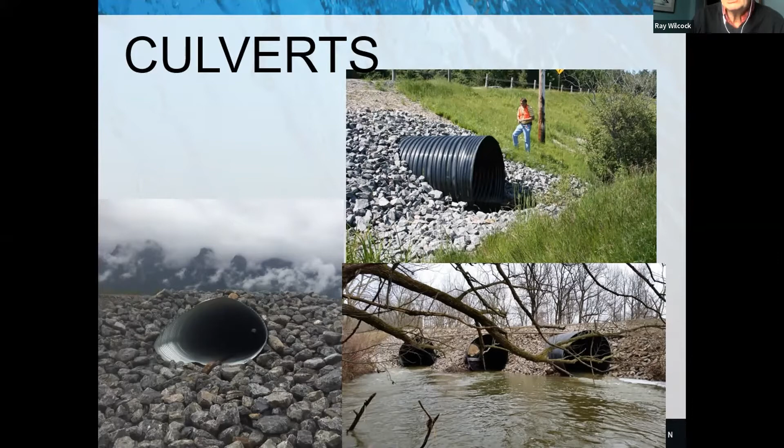This is a culvert, a little different from spiral rib, just to show you, from upstream to downstream, underneath maybe a road or a highway. There are millions of these across the country. They can be silver on the left or black on the right. Sometimes they come one at a time, or the most I've ever seen in a crossing is probably close to 13. But this is what we're going to talk about today.

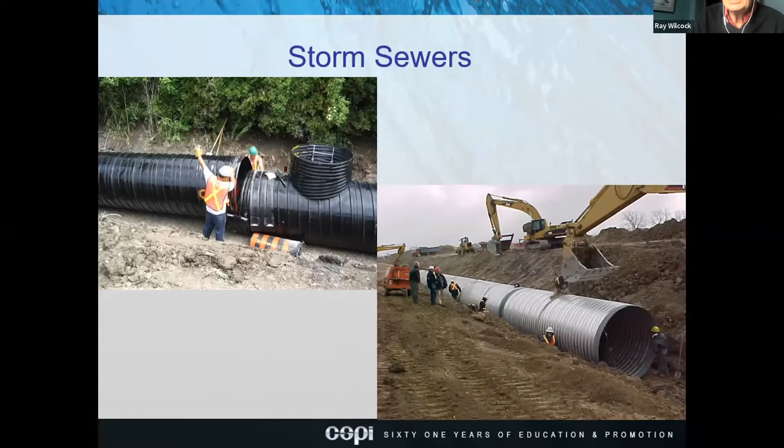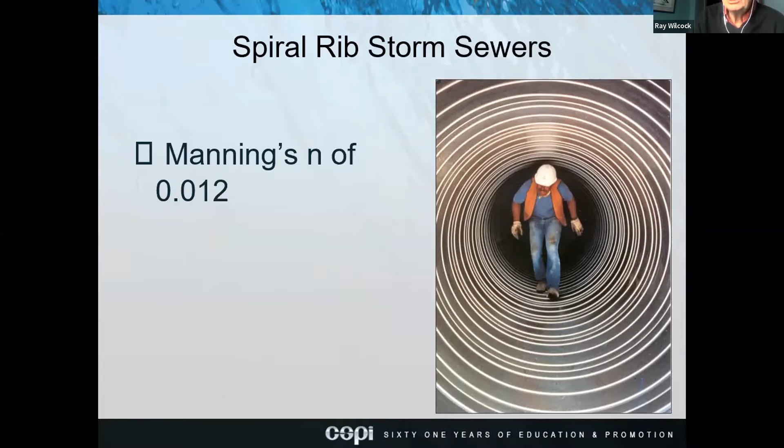This is a storm sewer. It's a spiral rib, so it is smooth wall inside, ribbed on the outside. Sometimes they come with risers, or they can be connected to a concrete manhole. The Manning's N for the smooth wall inside is 0.012, equal to a smooth wall concrete or a smooth wall high-density polyethylene pipe.

The profile for spiral rib is 190 millimeters from rib to rib, and 19 from rib down into the valley. You can see some of the other profiles we have - those are corrugated steel pipe, which is ribbed on the inside and outside. So spiral rib is a little different.

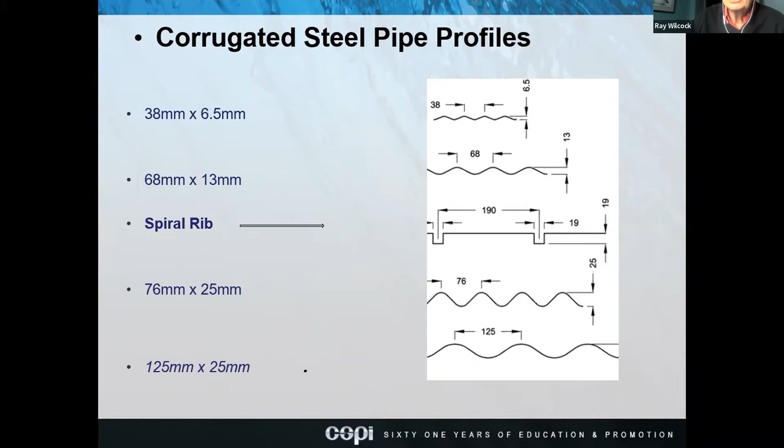A little bit about durability. I wanted to show you this pipe, which is about 85 years old. It's a riveted pipe, just outside of Winnipeg, Manitoba. You see all that white stuff on that pipe? That is calcium carbonate, which forms on the pipe from hard water conditions. It protects the zinc - this is a galvanized pipe, so it protects the zinc, which protects the steel. That pipe is 85 years old.

Provided that the water doesn't change and continues to be hard, and that calcium continues to stay on there, that pipe will last pretty well forever. However, if you take that same pipe and put it into another jurisdiction in Canada, it will not last as long because the water chemistries and soil chemistries can be quite different.

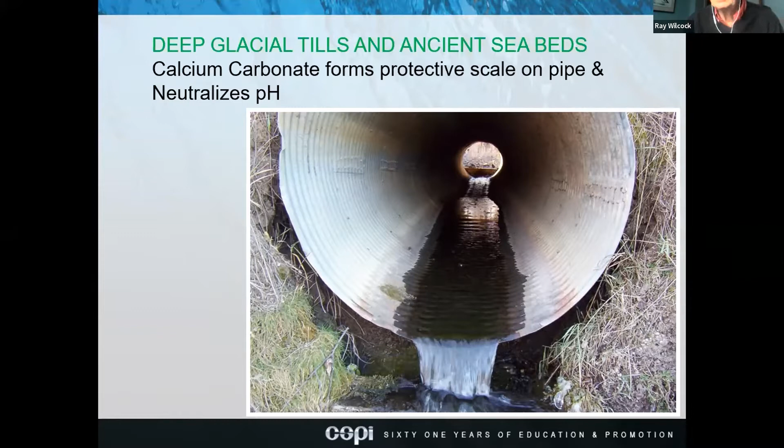Now this is a pipe I wanted to show you just outside of Grande Prairie, on Highway 43, between Edmonton and Grande Prairie. You see that bottom picture - this was taken back in July 2003. You see all that white stuff on the bottom of that pipe on the left-hand side? That is salt, heavy chlorides. That salt stays in those pipes 365 days of the year.

With the salt, which can be very corrosive, you need better protection. So the protection on those pipes is polymer laminated steel - galvanized steel with a polymer laminated 12 mil coating on either side of the pipe to protect it from that salt and corrosiveness. I've been to that site for many years; it's a great site to go look at and make sure the coating thickness is good. The salt you see in that July 2003 picture is the same as what you would see today if you visited that site.

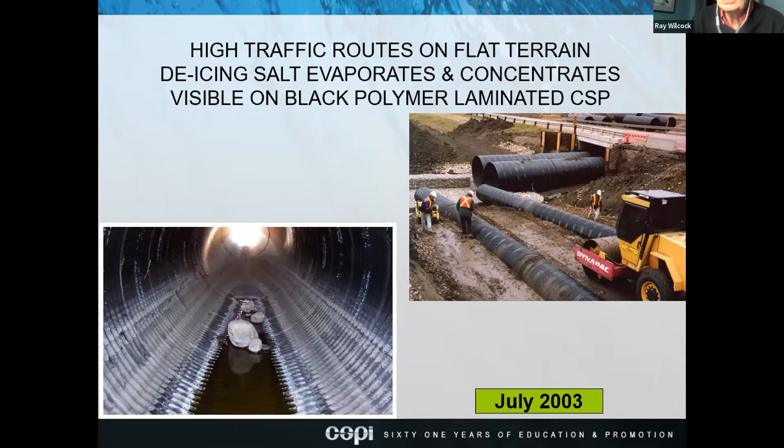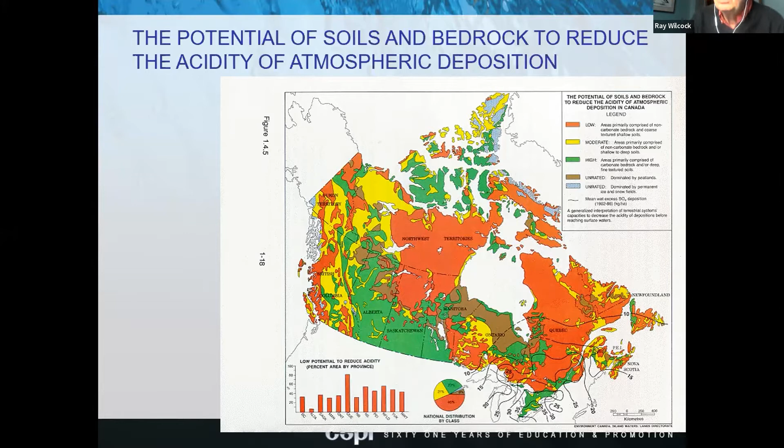The topography of Canada is quite different. If you look at the West - Alberta, parts of Saskatchewan, parts of Manitoba, and even parts of Ontario - you'll see the green areas, which basically have very heavy limestone, so you get a calcium carbonate buildup, and you can get away with using galvanized steel. But as you get into more acidic environments, particularly areas like Quebec, parts of Ontario, and parts of the Atlantic provinces, you're going to want a different coating - aluminized galvalume or polymer laminated.

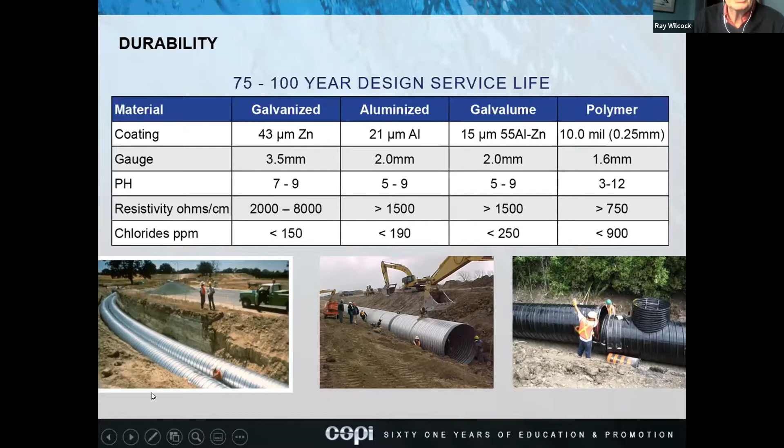And then one more chart I wanted to show you. This is what I use a lot when I am testing water and so forth, so I'm able to go to a chart and determine what type of material I would use for that particular environment. Again, it covers pHs, resistivity, hardness of water, and also chlorides.

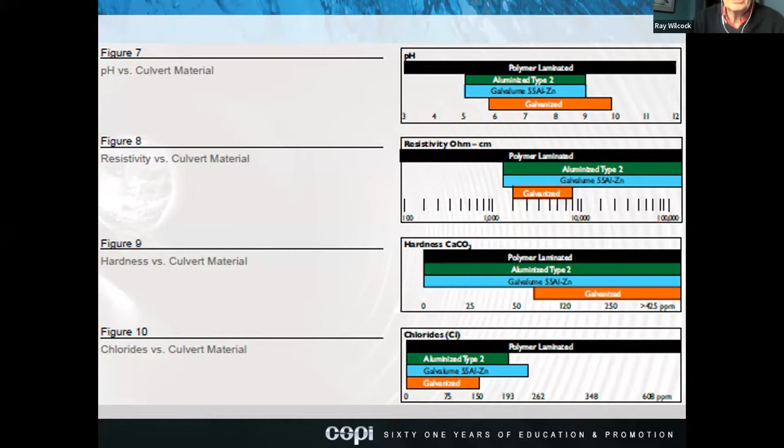So now I'm going to stop sharing, and I'm going to turn the presentation over to Doug Leitch.

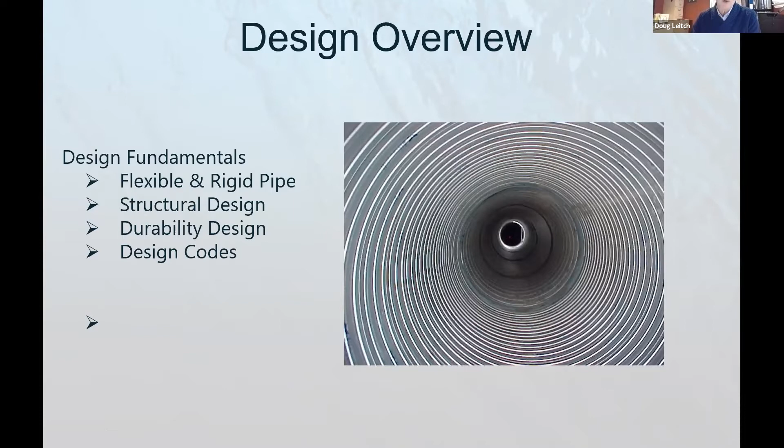We're going to talk about some design fundamentals, both structural design and durability design. I'm going to touch on both rigid pipes and flexible pipes because it's good to understand the difference between the two of them, and also the codes and information needed to do these designs. First of all, flexible pipes include high density polyethylene, PVC gravity pipes, and of course our corrugated steel pipe.

The interesting thing about them is they're all thin walled. They're flexible pipe in that they'll move around a little bit, and they gain strength from the soil interaction. The backfill is important - it's granular, well-graded material with known properties, and known properties certainly include the chemical characteristics as well, as Ray related to you earlier.

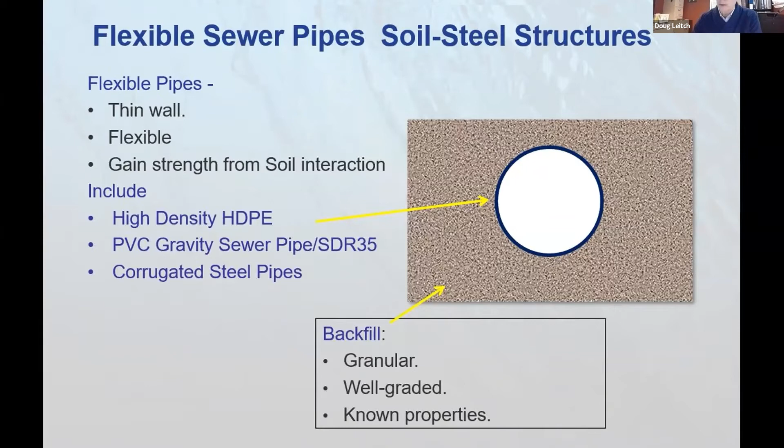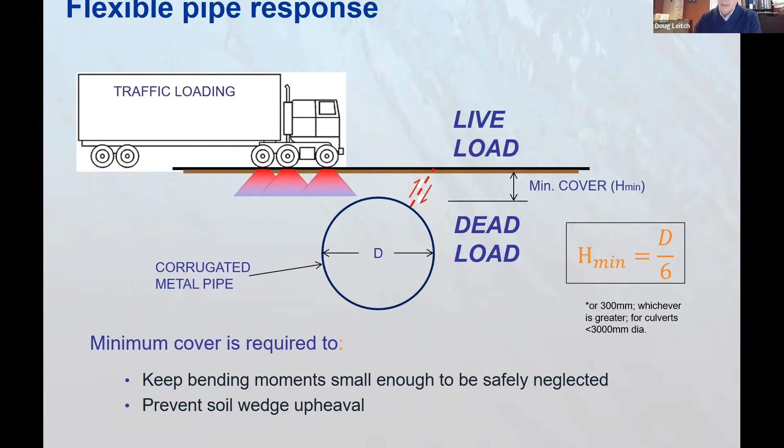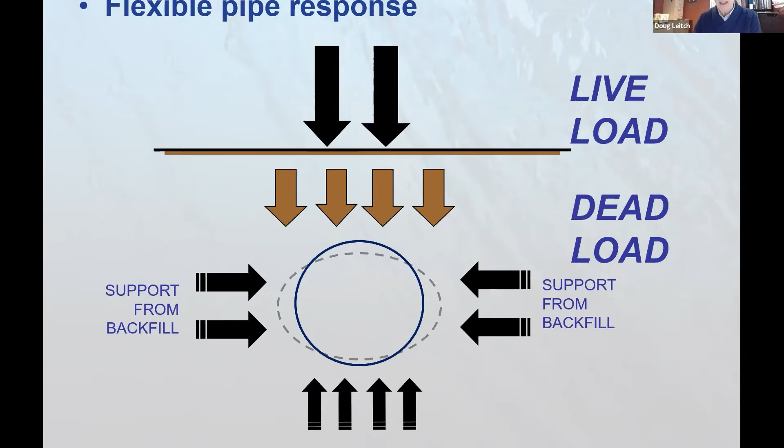If we look at this a little bit closer, you can see this is the response of a flexible pipe. The load is applied vertically to the road surface, and then distributed through the height of cover and onto the pipe. As a flexible pipe, this has a tendency to push the structure down, and as it does, it mobilizes the side support here, keeping it in place. You end up keeping the pipe circular, and end up with what we consider ring compression, where it holds the whole pipe circular, and the soil and pipe act together.

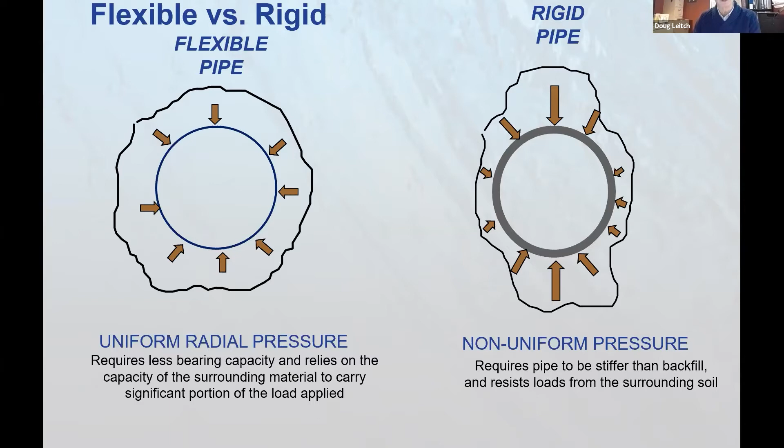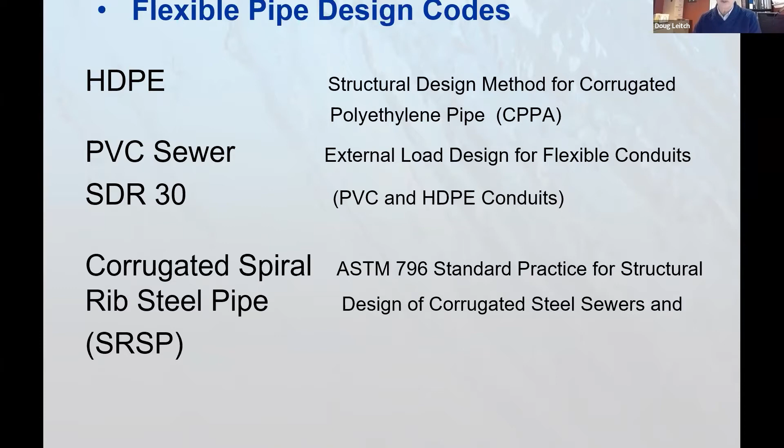Flexible pipe, all kinds of pipes have design methodologies for them. HDPE uses the Corrugated Pipe Association manuals. There's a PVC manual for assistance. Our own corrugated steel pipes often use ASTM 796. And some of the other manuals we have, there's AISI design for corrugated pipe. It's kind of the granddaddy of designs, if you want to call it that, and it's found in the Handbook of Steel Drainage and Highway Construction Products. That's a publication of the CSPI, Ray's group, and certainly available from him if you're looking for that.

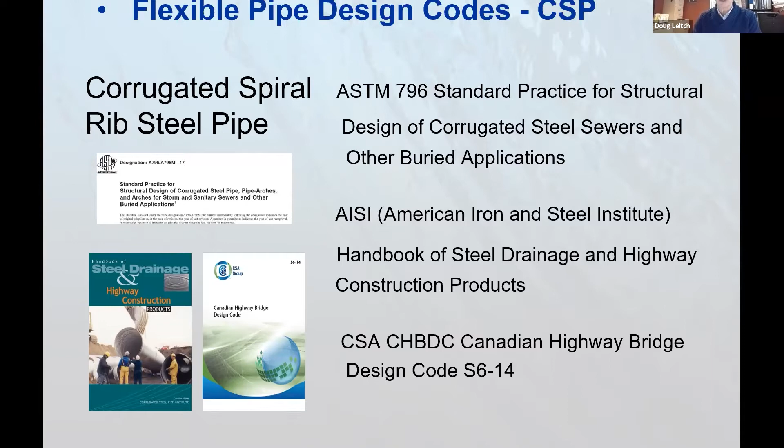When pipes get larger than 3 meters in diameter, you can also use the CHBDC, the Canadian Highway Bridge Design Code. On the rigid side, the design requirements are all laid out in CSA A257.2, the Ontario Concrete Pipe Association manual, and kind of the granddaddy of concrete pipe design is the American Concrete Pipe Association manual.

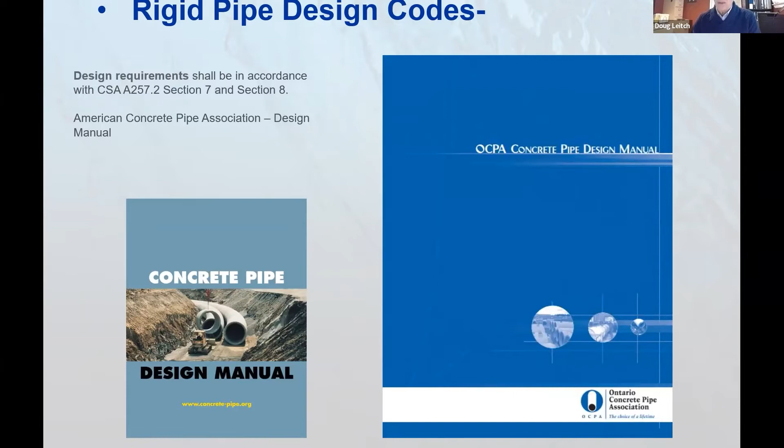So the point I'm making here is there's a lot of information on designing pipes, a lot of different methodologies of using. But at the end of the day, the most critical part is the height of cover. All of these pipes can basically be brought into a very small and important collection of documents produced by the Ontario Provincial Standard Drawings, the OPSD - those are height of cover tables, also found in the MTO gravity pipe design guidelines. So it's important that you look at all the documents before, but when it boils right down to it, these four pages in front of you are very much what's involved in designing pipes, be they sewer pipes or culvert pipes.

In this, you can see in the top left, here we have the height of fill table for spiral rib. Here's your concrete table. It's a little more complex because it's a rigid pipe design, so there's a few more details and notes to keep track of. And on the bottom, we have the HDPE and the PVC height of cover tables.

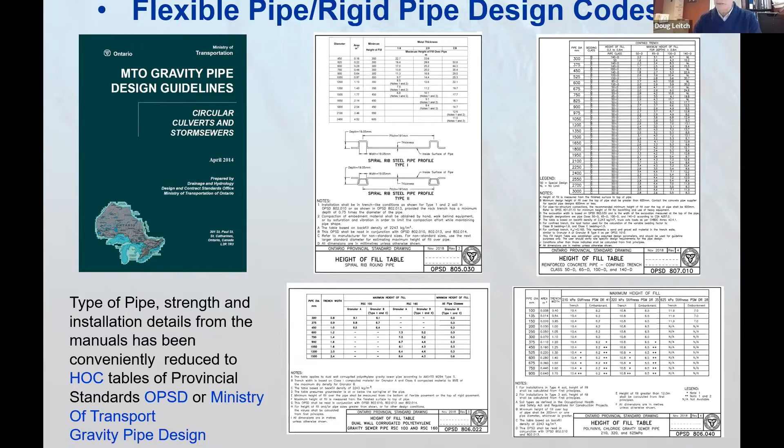What this shows is I've taken some of the documents, and down the one hand side, we have the diameter. Across the top is the type of pipe, and the maximum and minimum covers are shown here. So for instance, if we look at a 600 pipe, you read this document - HDPE requires a minimum cover of 0.3 meters, 300 millimeters, and it's good to a maximum of 7.3 meters.

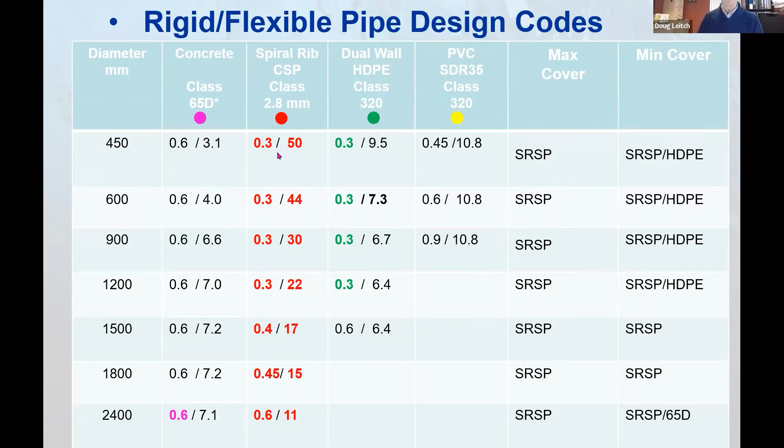Now, taking one step further, what this shows is I've assigned a color to each particular type of pipe. And when it's colored, it means that this is the maximum of all the pipes or the minimum of all the pipes. So for instance, in 600 millimeters, the minimum cover is 0.3 for spiral rib and 0.3 for dual wall. So they both get to show up in color because they're the minimums of the minimums, if I can put it that way. What it basically illustrates - you see a lot of red there, and what that's saying is the spiral rib is extremely good for low cover situations and extremely good for high cover situations. It's a very versatile pipe, and it covers the whole realm of installations that you may require.

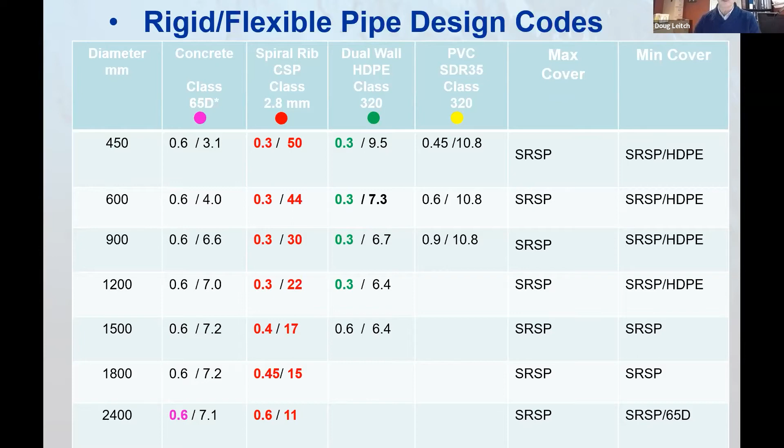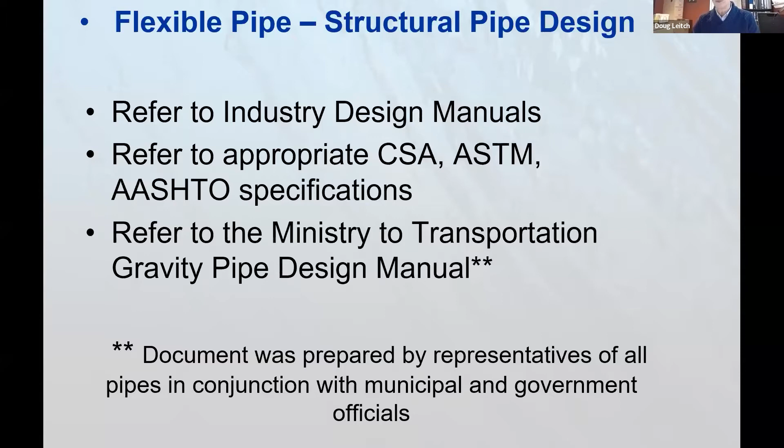In flexible structural pipe design, really the height of cover table is always where you want to start. They'll probably give you a significant portion of what it is you need to know. But remember, always refer to the industry design manuals - there may be things in there that you should consider as well. Use those specific specifications that are listed. And I would encourage you to refer to the MTO Gravity Pipe Manual. This is a document that was prepared by representatives of all pipes in conjunction with municipal and government officials, so it covers the whole gamut of everything.

So that would cover your structural design considerations, but in order to get a good pipe, you also have to look at durability design. Ray touched on this a fair bit before, and he'll probably finish with a little bit more. But what do we mean when we talk about durability design?

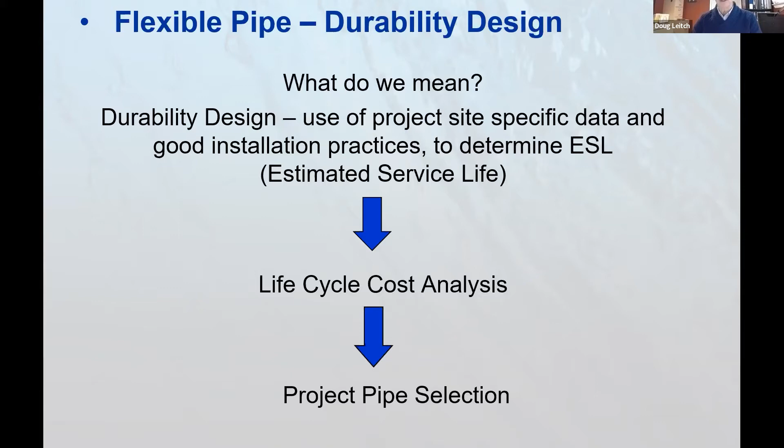Well, it's the use of project and site-specific data, and installation practices to determine an estimated service life, or ESL. But that's not the end of design, because the ESL is then put into a life cycle cost analysis, sometimes called an LCCA. And once you have your life cycle cost analysis, only then do you have a proper project pipe selection. So what the manual does is help you a whole bunch to follow your way through this.

Estimated service life is a function of soil and water chemistry, material coatings, installation, backfill composition, and flow conditions. Now, soil and water chemistry might sometimes be difficult to get, but you can always get a testing kit from the Corrugated Steel Pipe Institute, and there are documents with this information in place. So I'd encourage you, if you haven't got that, contact your local ArmTec representative or CSPI representative, and they'll be able to help you get that information.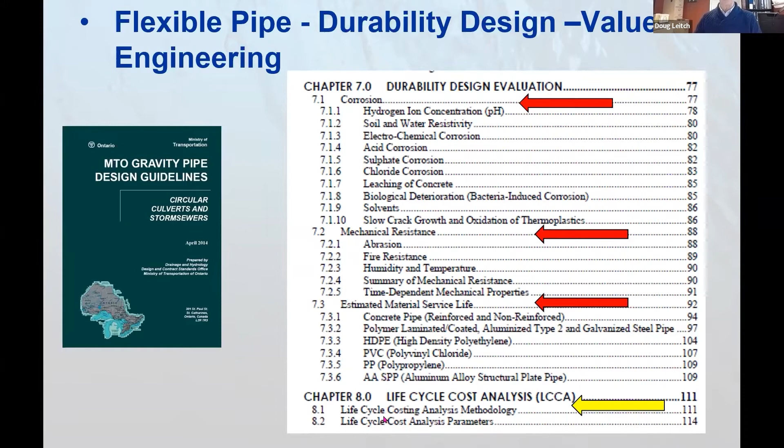That information can then be entered into your life cycle cost analysis. So you can follow along with the procedure right there.

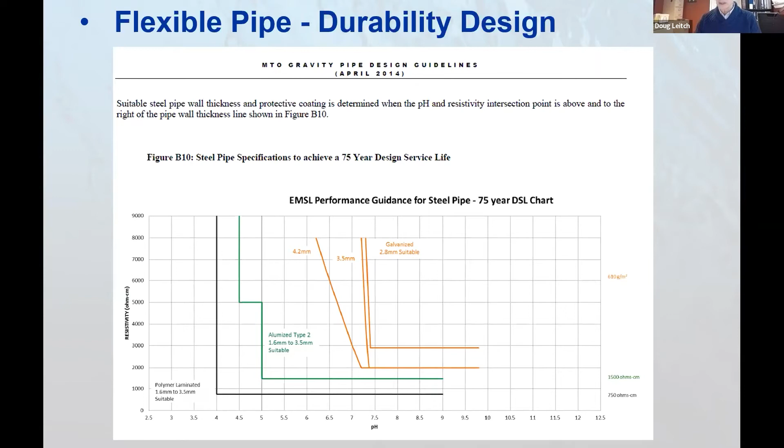The other option is polymer laminated, shown here in black, so it's also going to give you what you want there. Essentially these charts do a lot of the work needed to get that estimated service life. So we've talked about design for structural and durability. Do that, and it ensures your project is value engineered.

Let's go through a few case studies here, and then I'll pass it back to Ray. This is a job I'll call a 20-year job, started back in the early 2000s. The city of Sarnia had an area of over 1,000 acres of residential subdivisions and 4 schools that they wanted to expand and service. The job was originally bid in 2000, or the late 90s in any case, and it was bid with both spiral rib steel pipe and concrete pipe. The spiral rib came in at $500,000 less in servicing costs, and the project went ahead with 2.6 kilometers of 2100 through 2600 aluminized spiral rib trunk sewer.

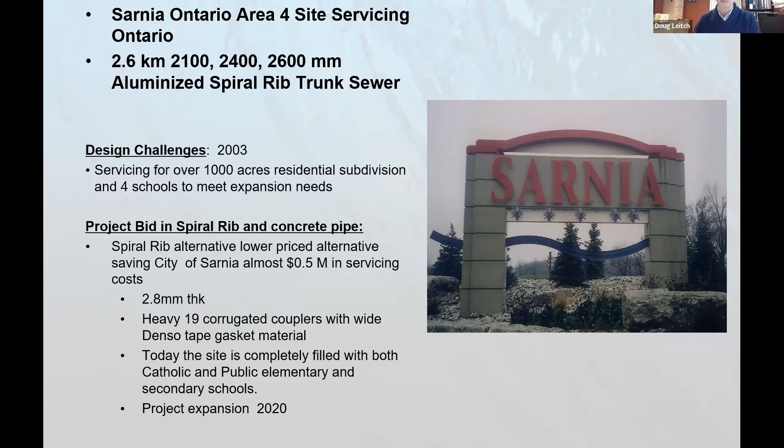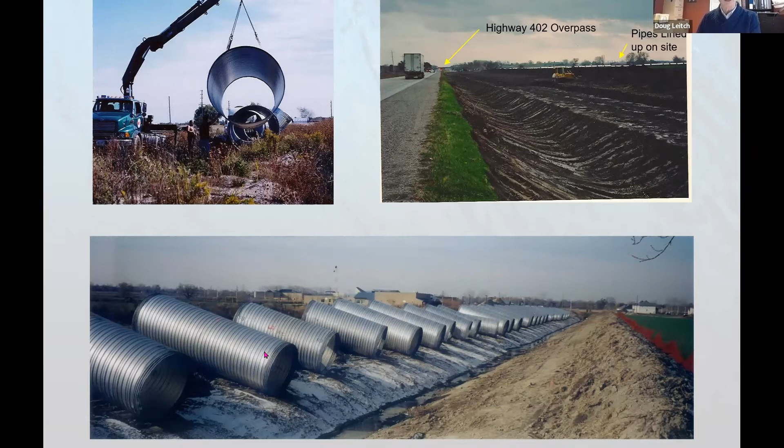This is the job itself. I don't know if anyone is aware, but this is the Highway 402 overpass that runs from London into Sarnia. This is the job site being serviced, and these are the pipes lined up on the edge of the allowance for the sewer. The pipes were offloaded and placed along the right of way, ready to be put in. The pipes were 8 meters in length, all numbered, so you just plop the number in and drop it into the ground.

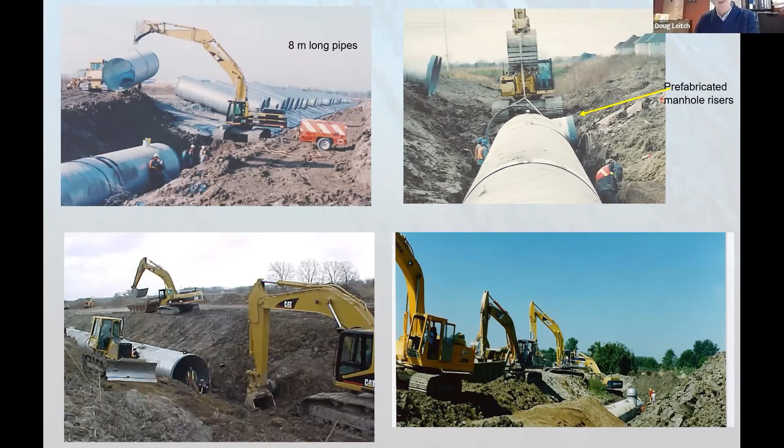All the manholes were prefabricated, so they were just set in as well, and you can see here it went very, very fast. At this point there were actually 4 excavators working, digging and compacting, and at times they installed approximately 500 feet of trunk sewer in one day.

The couplings were gasketed with bolted corrugated couplers. You can see here they're backfilling and tamping for compaction. They left space to add a service tee in, and once finished, this is what the backfill envelope looked like.

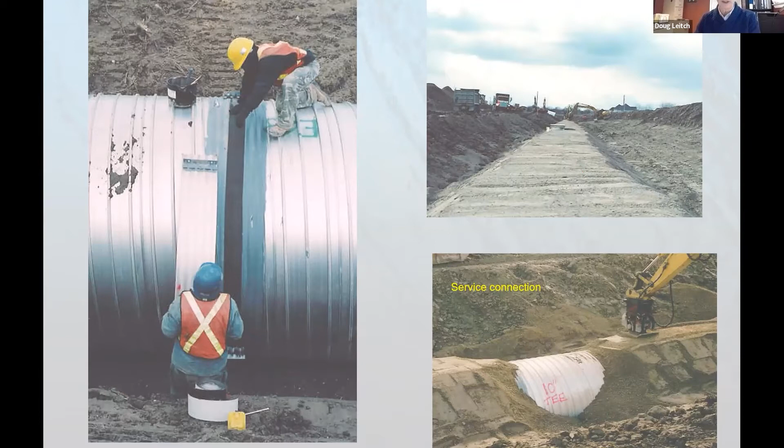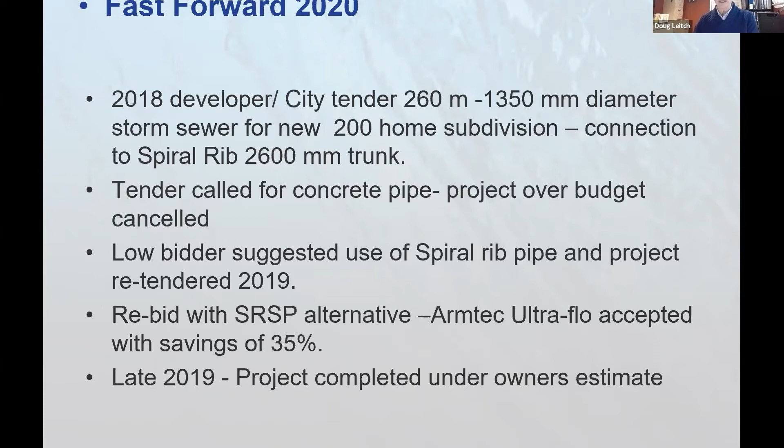Fast forward to 2018, a developer wanted to add a 200 home subdivision connected to the 2600 trunk with a 1350 millimeter diameter storm sewer. There was a tender called for that in concrete pipe. When they got the bids, the project was over budget and canceled. The low bidder went back and suggested to the owner, why don't you use spiral rib? When the project was re-tendered in 2019, spiral rib was selected, with savings of approximately 35%.

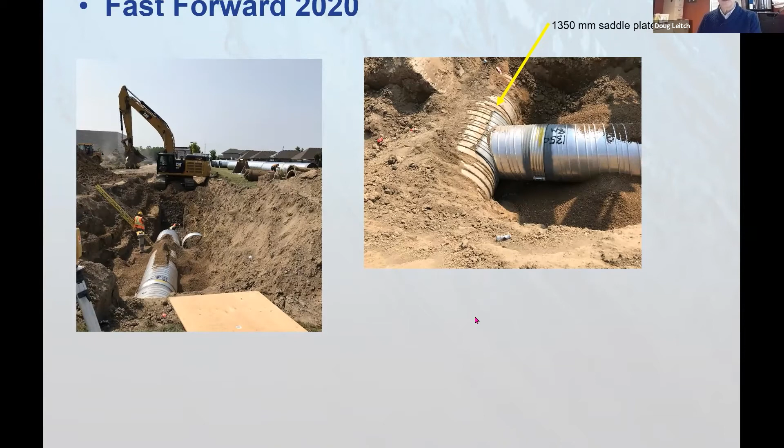I'll make a quick comment about this. This is the 1350 here, and this is the service connection into the 2600. When the service connection was added, we cut a hole into the 2600, and I took that piece of pipe and sent it to Ray and said, can you measure this and see how we're doing? He did some testing and found that the coating after 20 years had lost 0.5 microns, representing about 2% of the corrosion protection. So basically we still have over 90% corrosion protection left in that main sewer line after 20 years.

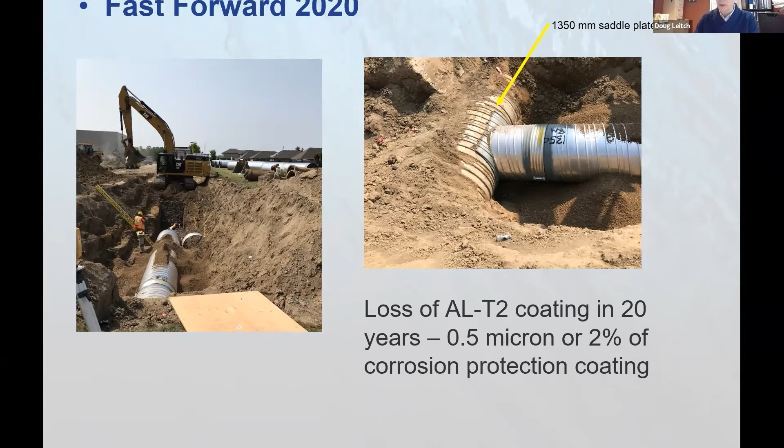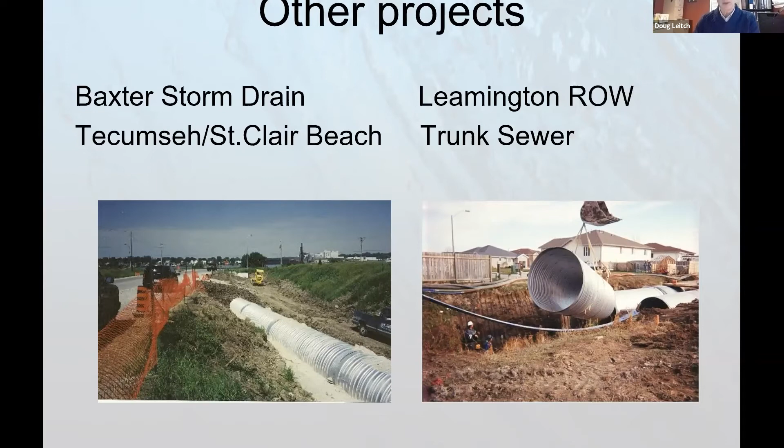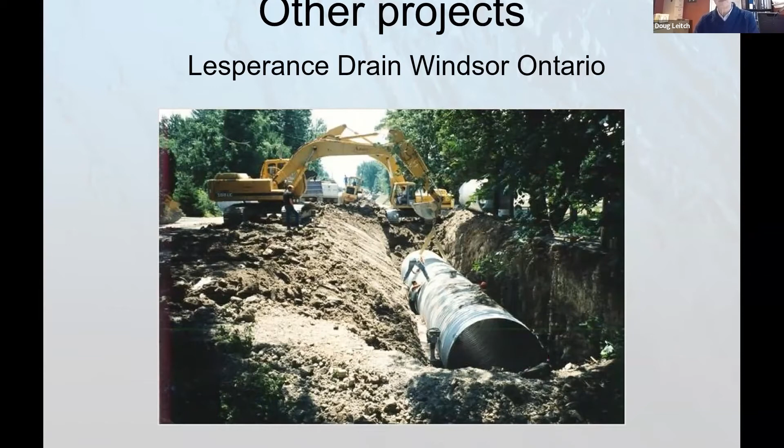This was an interesting job in the Windsor area, another situation for an expansion further upstream. Very tight room here - you can see the roadway, the trees and the houses in between, and they didn't want to get into the road. As you can see, there was not very much room here at all. The spiral rib pipe wall is very thin, but with a concrete pipe the walls may be as much as 18 inches wide, because they may be anywhere from 8 inches width on each side. So this was a very narrow place to fit in - they're excellent pipes for where there's little confined space and low cover.

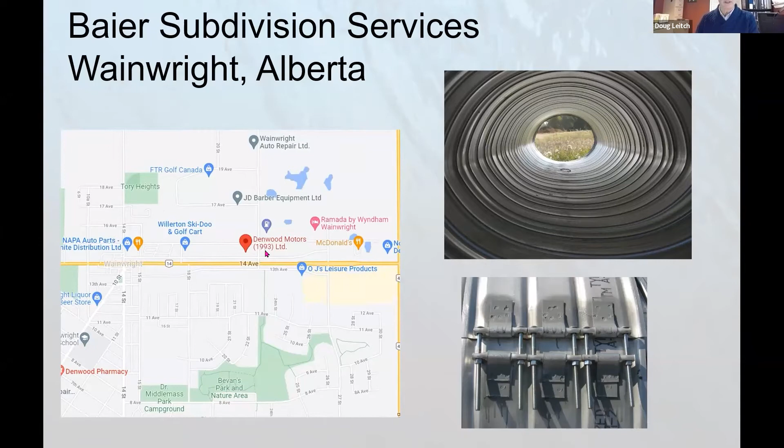A project done just a couple of years ago in Wainwright, Alberta, about 200 kilometers southeast of Edmonton. Again, a low cover situation, so the consultant selected the pipe arch shape. The subdivision was up in this area and was being drained down to Highway 14 across the road, where it was going to be dumped out. Here you can see the manholes sitting there, cut out to accept the pipe arch, and the pipe came across, made an abrupt 90 degrees and came out. There was so little cover that this particular chamber was built, and then they outletted it with 3 smaller diameter pipes.

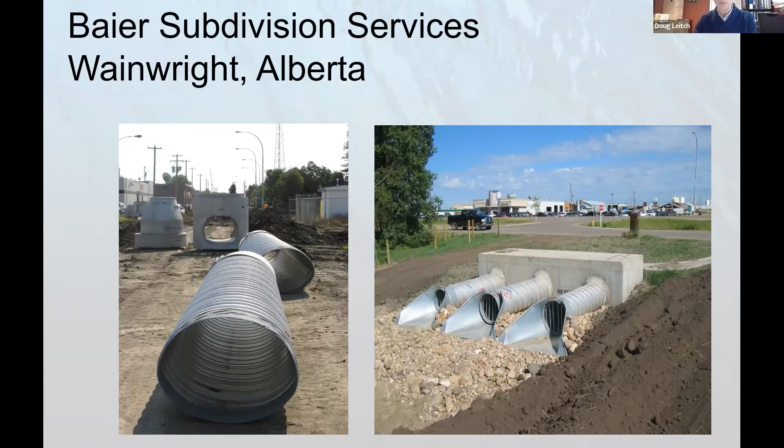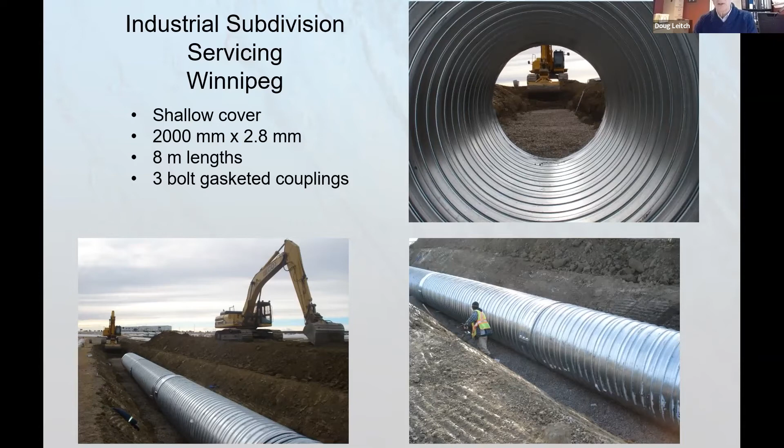Finally, this was an industrial subdivision, again near Winnipeg, with very shallow cover. If you look here, there's not very much room at all over top of this particular pipe - 8-meter lengths, gasketed couplings. You can see there's not very much cover, but how simple it is to backfill. He's doing the haunch area, and the pipe would then be backfilled later.

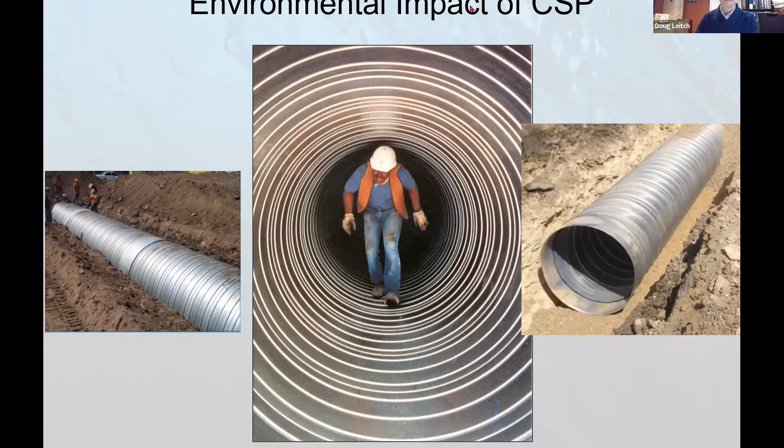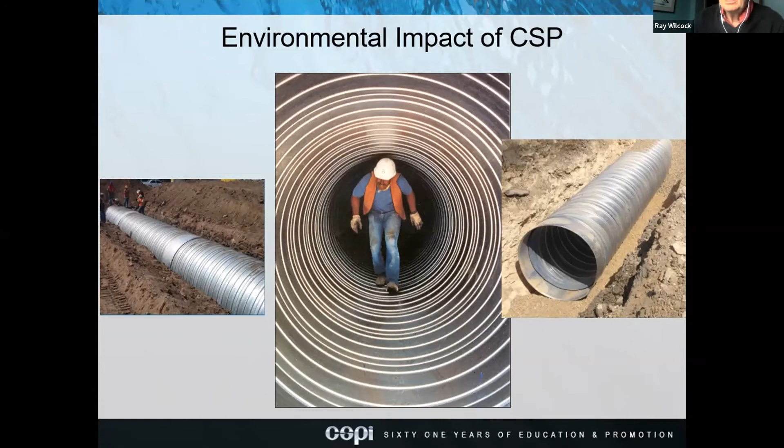Okay, so what I am going to finish off with is give you some results of the environmental impact of corrugated steel pipe, spiral rib pipe, and the like. We undertook this study about 4 years ago, and at the time we wanted to know where we stood with regards to our carbon footprint, our emissions, eutrophication, smog, and everything that goes into making of these particular products.

If you were to go to our website and look up what is called our environmental product declaration, which is about 12 pages long, you would see this particular page there, which is the results of looking at 1 metric ton of corrugated steel conduit. Basically it's done by a third party, so the data is gathered and they look at it from cradle to grave, more or less - where it comes from, how it's produced, then transported to a manufacturer, a pipe is made, installed, and has a life cycle, then it's either recycled or sent to a landfill site and so forth. That's the way they look at the environmental product declaration, to give you an idea of where you are with regards to your carbon footprint.

So if you look at this particular chart, it's not easy to understand. I'm hoping that future environmental product declarations will be much easier for readers to read. Probably you can all do the math here, but it's not easy to do. When you get, for instance, for ozone depletion, 1.79 times 10 to the minus 13, it's not easy to figure out just off the top of your head.

Well, I'm going to just show you quickly, much easier to look at. So it looks at the impact category here with global warming potential, ozone, acidification, which is acid rain, eutrophication, which is that green stuff sitting on water and all that pollution, which is not very nice. It looks at the ozone layer and then also depletion of fossil fuels and so forth.

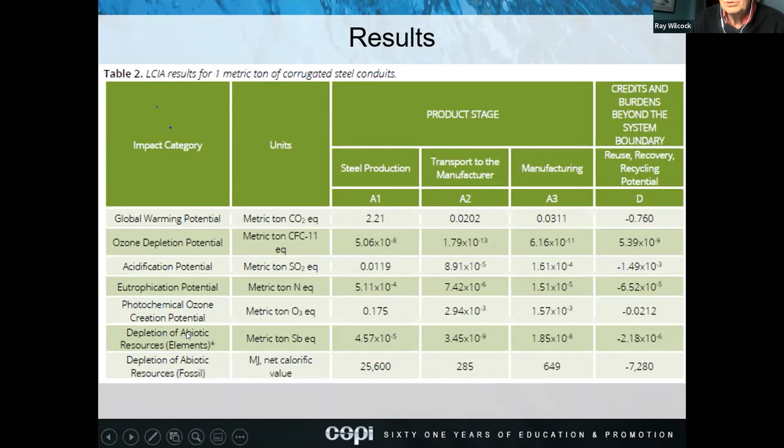So if you were to look at the greenhouse gases of 1 meter length of 450 millimeter diameter pipe, corrugated steel pipe would produce 40 kilos of carbon. If you were to take the same 1 meter of concrete pipe, it would produce 80 kilos of carbon for that particular diameter.

For corrugated or spiral rib, that's the equivalent of 158 kilometers driving an automobile, or using 1.6 propane tanks on your barbecue. In this example, a third party will look at it and compare environmental product declarations. So if an EPD is available to the public, you can compare product to product, material to material for the end use.

And determine who has a smaller carbon footprint at this point in time. Now, we're all trying to get to zero in the future in line with the Paris Accord, but we wanted to look at where we stood right now. Were we good? Were we bad? And what we needed to do to improve and get better. So right now, based upon published results, we have half the carbon footprint of concrete for that particular diameter.

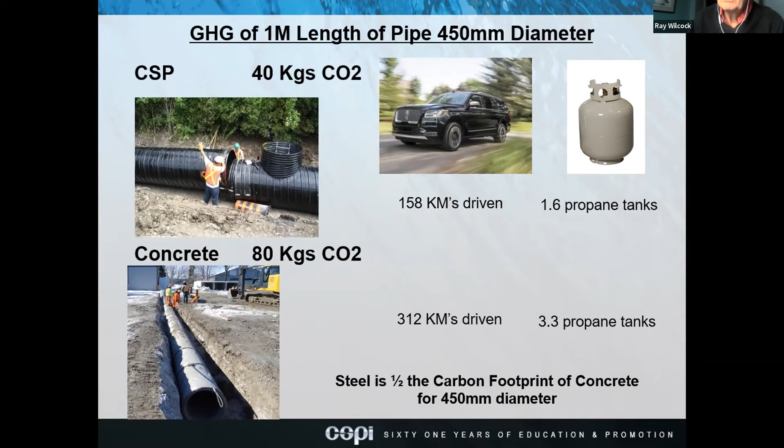Now, if you extrapolate that out to the larger diameters, the green is spiral rib, the black is high density polyethylene, and the gray is concrete. You will see that as the diameters get bigger, 900, 1200, 1500, 1800, 2100, 2400, spiral rib has a much bigger advantage to HDPE, advantage to concrete, and the advantage gets very large when you get into some of the larger sizes. Why? Because concrete is very, very heavy compared to, say, steel.

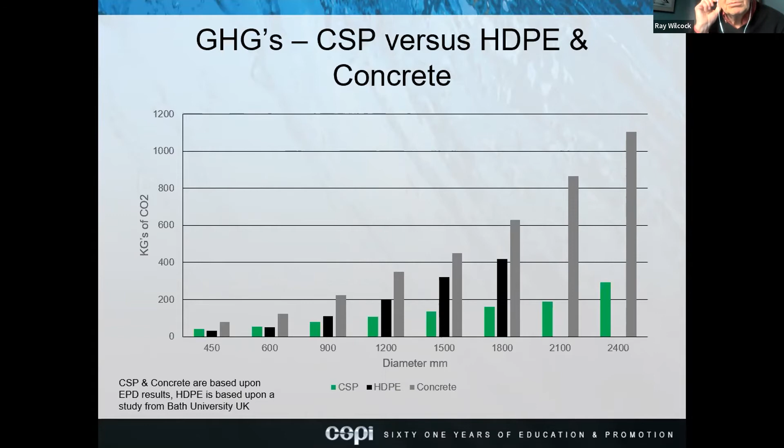We only change gauge with polymer laminated when we get to about 1800 millimeter diameter. So we can use 1.6 millimeter thickness all the way up to that particular diameter. And when we get to that diameter, we shoot over to 2.0 millimeter, but still very thin, basically your earlobe type of thickness and so forth.

Again, it's easy for me to sit here and spew this out and say that we have the smallest carbon footprint. But if you're interested in those documents behind what I say, they're produced by third-party companies out there, and these third parties consist of scientists, environmentalists, climatologists, engineers and so forth. You pay a lot of money to do this type of work, but they will determine what your carbon footprint is, and then every 5 years after that, a new environmental product declaration will be provided.

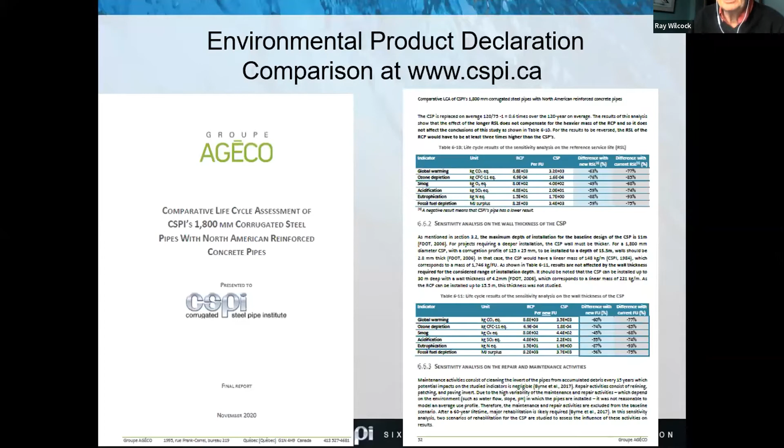So in 2023, we will do a new one and determine, are we improving from 2018? And the answer will be, I can tell you at this stage of the game, absolutely, based upon what our members are doing. But the fact is, it will show you the numbers for the last 5 years as to how we're doing. We have an environmental calculator on our website.

And it has basically 2 inputs. All you do is input the diameter in millimeters and then the length, how many meters you're using for your project. For this one, I just did 300, 6 meter lengths, and it will print out the global warming in tons, which is your carbon that you emit.

So CSP versus reinforced concrete, and it will show you the difference. It basically gives you an equivalent of kilometers driven. It will also show you the fresh water that is used to produce these particular materials, equivalent to the number of plastic bottles that end up in a landfill site. And then it will also show you the total primary energy that is used, electric, basically the equivalent of smartphones charged. So we have that on our website.

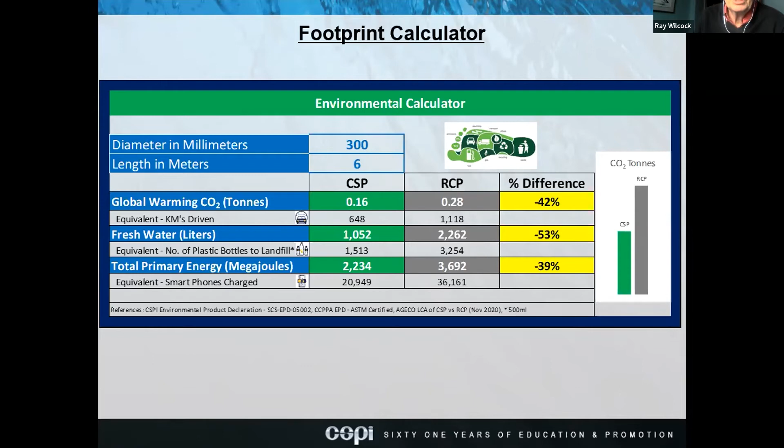Let me tell you a little about the legislation that exists right now. California is the leader in North America with what's called the Buy Clean California Act. If manufacturers want to provide products to the state of California, they're going to have to meet a threshold of carbon footprint, and each year the idea is to lower that footprint so that by 2050 it is neutral, zero.

In Canada, we have what's called the Canadian Federal Government Low Carbon Assets through life cycle assessment. At this stage, we don't have legislation that says that in procurement policies with municipalities. I assume one day we will, because it's fine for a politician to say they're committed to carbon reduction, but unless legislation is put in place, carbon taxes alone aren't going to do it. So I assume that somehow in procurement in the future, products will have to meet a threshold and then be lowered as we move forward.

In my research, the city of Calgary is a leading city out there, and they've moved to what's called Envision, a system where they capture the carbon footprint of everything they do within the city - procurement, and also the carbon footprint for the vehicles they use, transportation, et cetera.

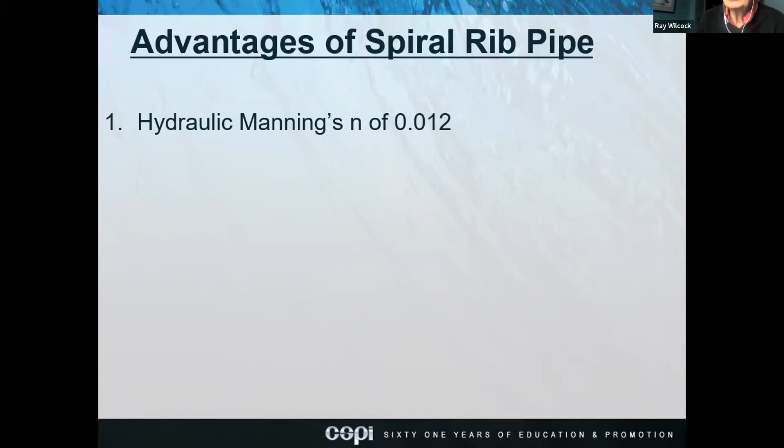So I want to finalize here by giving you some advantages of spiral rib pipe. It has a hydraulics Manning's N of 0.012. Some have said CSP has a higher Manning's N than a smooth wall pipe - that's true for corrugated steel pipe, but for spiral rib pipe, it is equal to smooth wall concrete or smooth wall high density polyethylene or PVC.

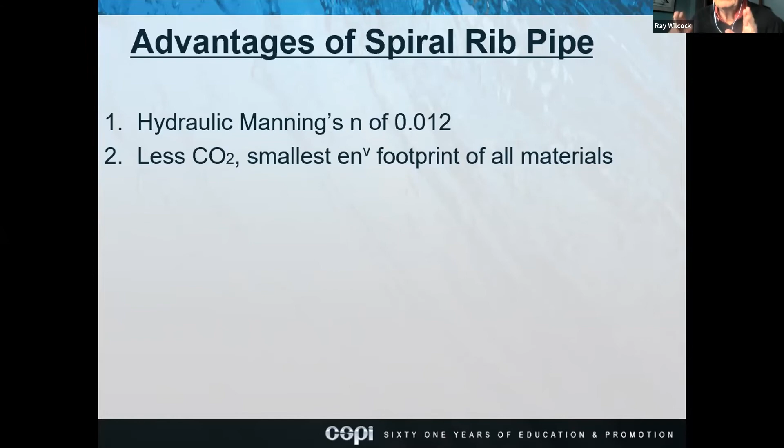We have the smallest carbon footprint of all materials that exist out there. Five years from now maybe that's not the case, but right now it is, based upon published public environmental product declarations that are out there.

Economy - savings to the taxpayer, as Doug pointed out in some of those case studies, huge tax savings to the public, the taxpayer, and the municipalities. We have longer lengths, less joints, faster installation. You can make this thing as long as you want. Manufacturers keep 6 or 8 meters in stock, but you can even make it longer if required, so a lot less joining systems.

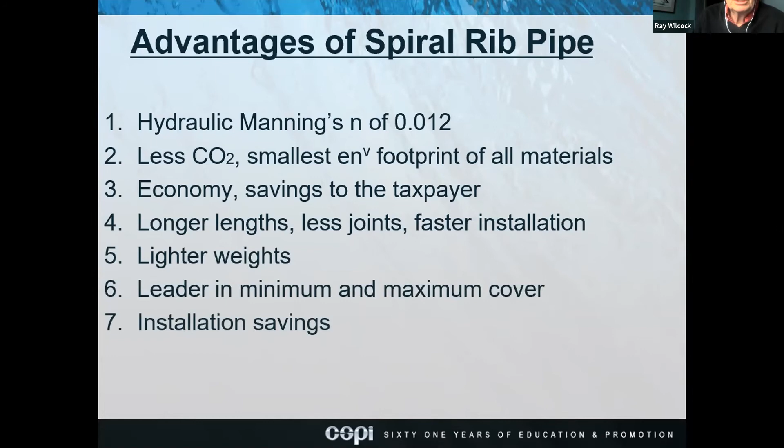So lighter weights - we're a leader in minimum and maximum cover, as Doug pointed out. Very misconstrued - you wouldn't think you could bury this 40 meters down into the ground, but you can. Installation savings, much easier to put together, and 75 to 100 year service life if that's what's required.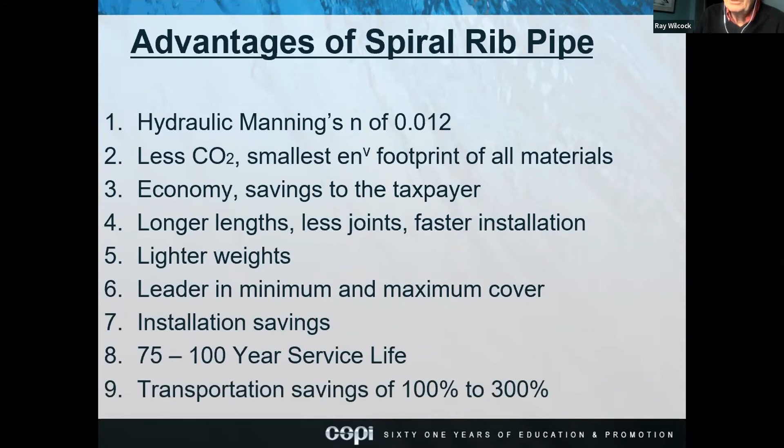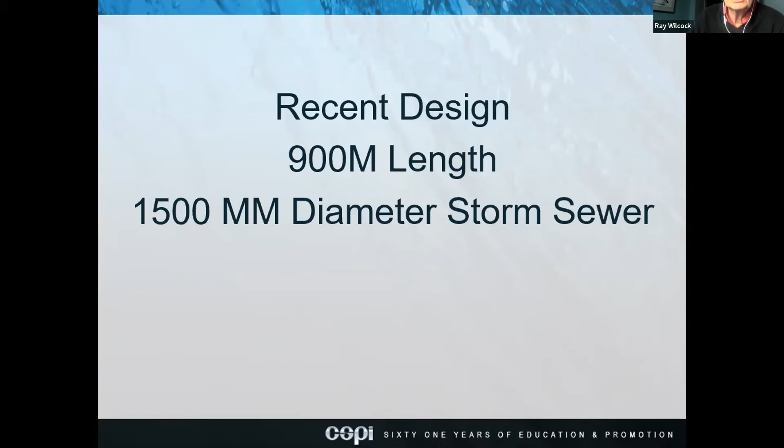I want to show you about a consultant who called me. They had a recent design with a 900-meter length of 1,500-millimeter diameter storm sewer. They asked me to compare a couple of materials and give them the carbon footprint of the differences. This shows the difference between spiral rib pipe and reinforced concrete pipe - you can see the total number of pieces. Reinforced concrete pipe is 2.4 meters in length, that's how it comes, whereas spiral rib pipe can be 8 meters in length or even greater.

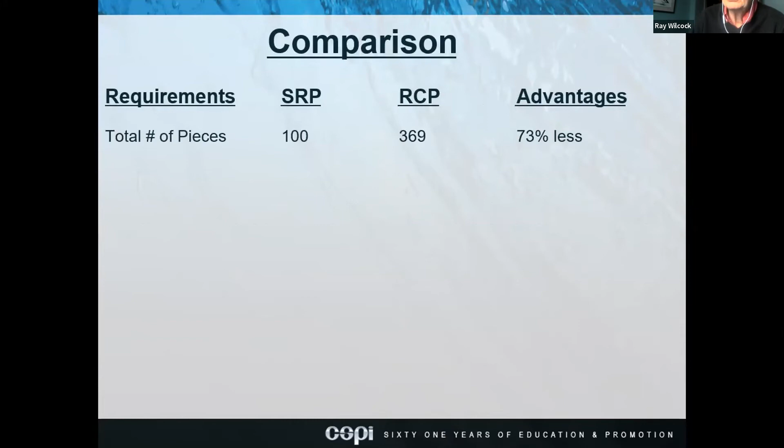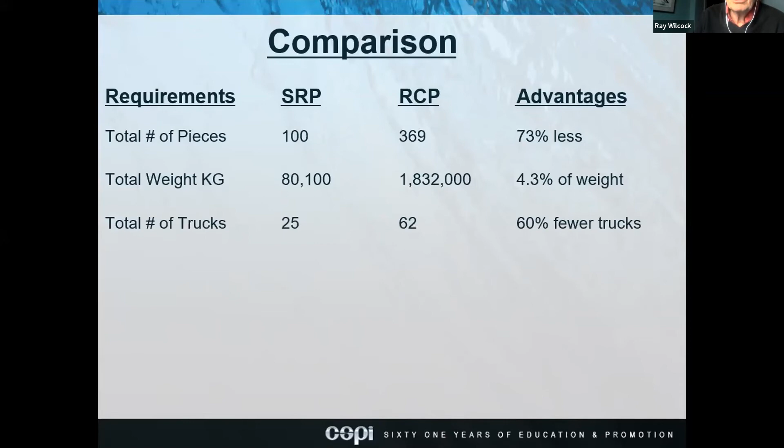But here's the big kicker - the weight. 80,000 kilos for spiral rib versus 1.8 million for reinforced concrete pipe, so it's 4.3% of the weight. You can see why the carbon footprint is so much lower - total number of trucks to get it there, excavation volume, thinner versus thickness on the walls as Doug pointed out, backfill material, installation time, and the carbon footprint: 121 metric tons versus 405 metric tons, or 71% less carbon emissions.

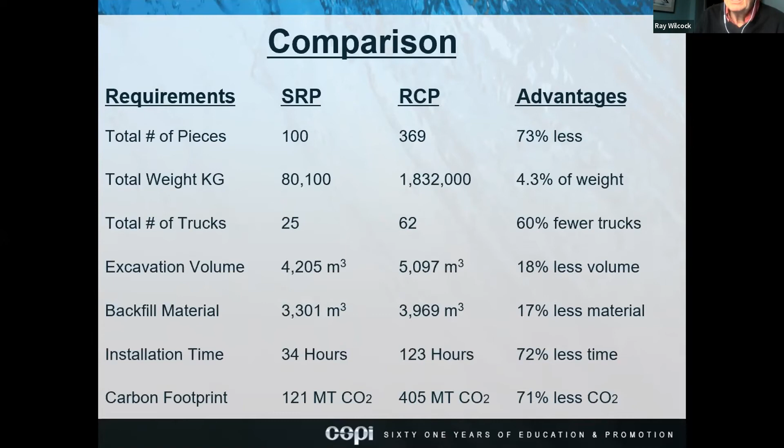Another thing is the cost, spiral rib to RCP - as the diameter increases, the economics really flow through. As Doug pointed out on some of those storm sewers out in Sarnia, a savings to that municipality of $500,000. What can a municipality do with an extra $500,000 by going that route? Maybe they probably wouldn't, but maybe they'd lower the tax base once in a while for us taxpayers.

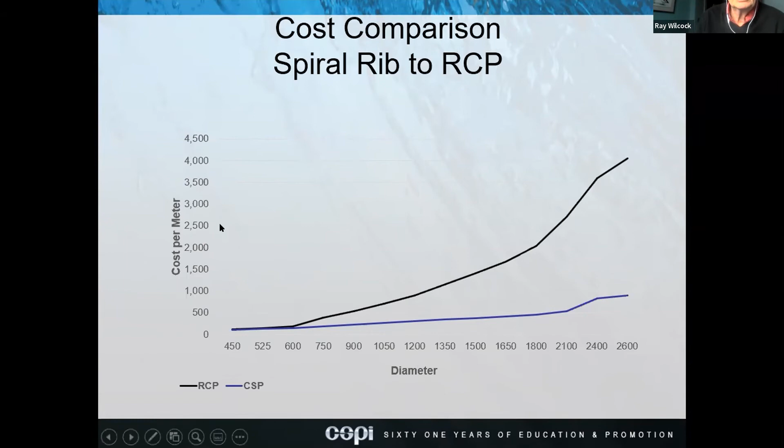There's been information out there saying all this stuff is brought in from the US or whatever. Spiral rib pipe is 100% Canadian made by manufacturers right across Canada. The raw materials that make it up are 80% produced in Canada and about 20% out of the United States.

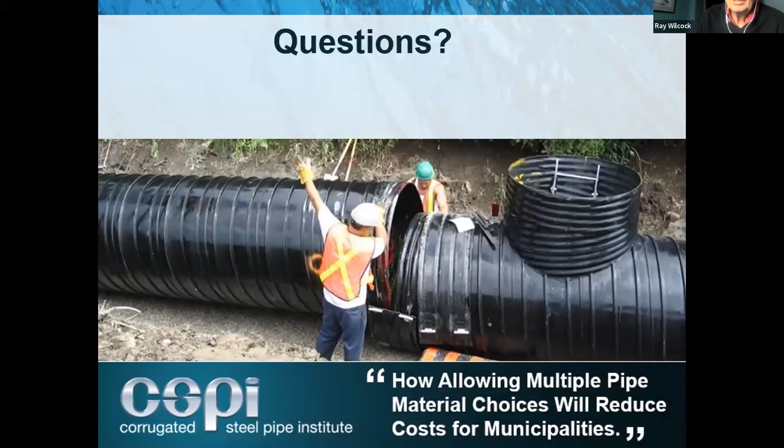Thank you very much, Ray and Doug, for this really informative presentation. I certainly enjoyed it. I have one question before we present the questions from the audience: you mentioned there's significant transportation savings from using spiral rib and corrugated steel pipe. Was that reflected in the carbon footprint report?

Yes, transportation is taken into consideration in the environmental product declaration. Basically, they look at how to transport one material, and they use an average of, say, 100 kilometers, and draw rings around plants, and determine how many truckloads it would take to transport material from one place to another. Weight is a huge factor.

So there's getting raw materials, whether out of the ground or using recycled material, producing it within a plant, transportation to a manufacturer who does the corrugating process, transporting it to a site, installing it, and then the life cycle after that, whatever happens to it.